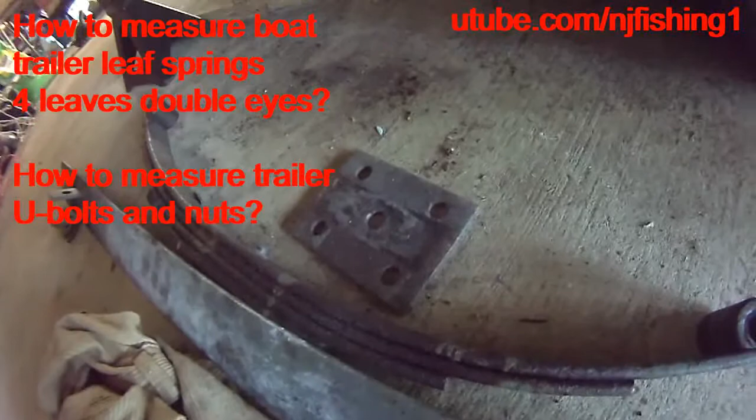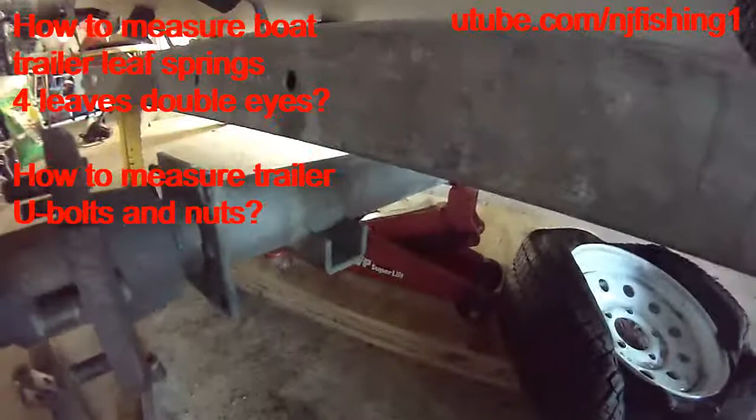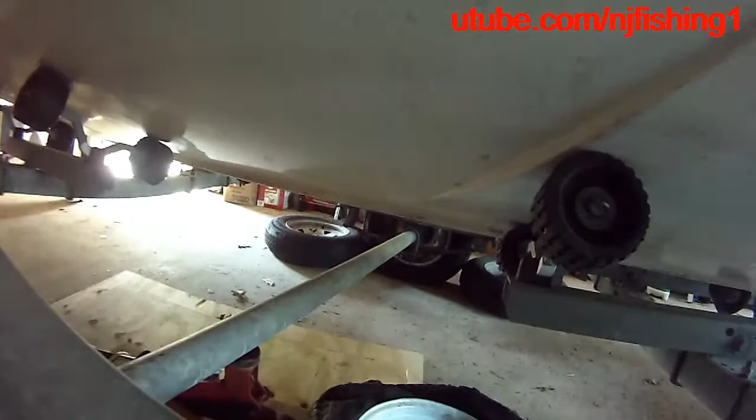Okay, so now I just want to measure everything and then take inventory, and then order parts. So this is one side of the trailer. I still got that other side to take apart and replace, but at least this section is done.

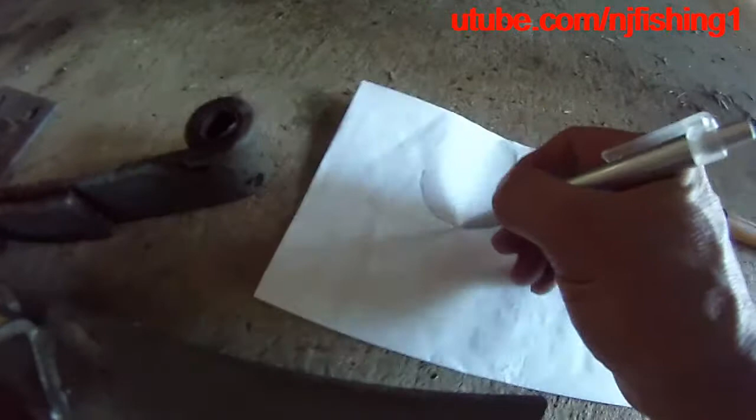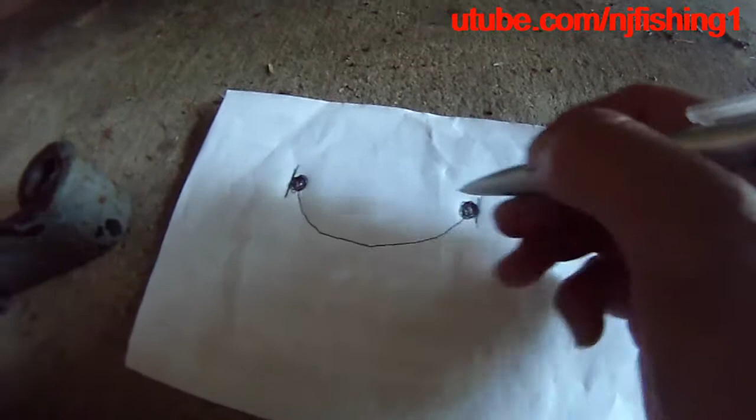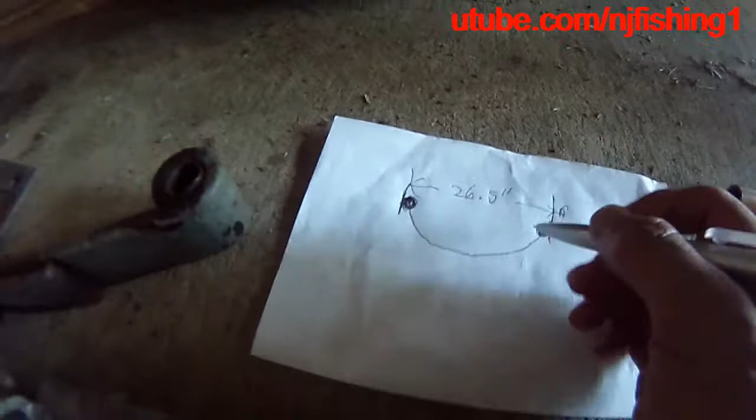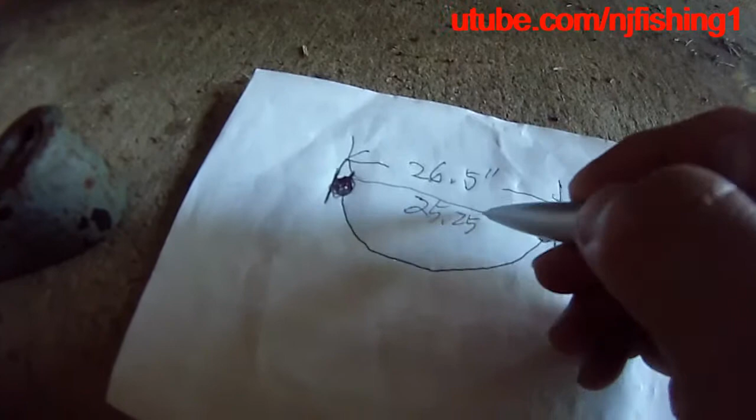Let me draw the map here. So basically I have this leaf spring, and from the most outside to the most outside of the eyelet, it's 26.5 inches. And from the center of the two, it's about 25.25 inches, 25 and a quarter inches. I could be off a little bit, but that's the best I can do.

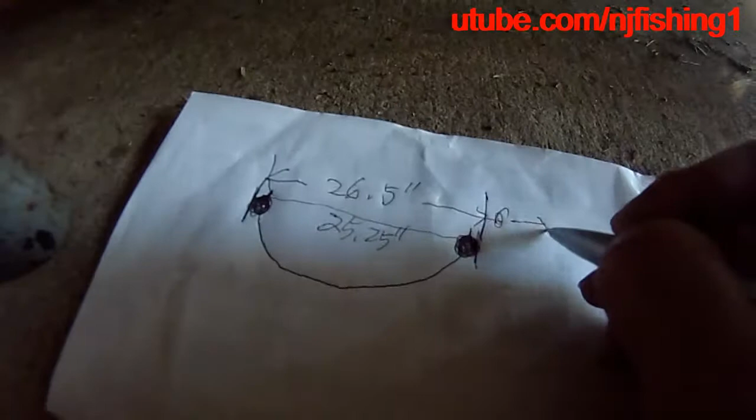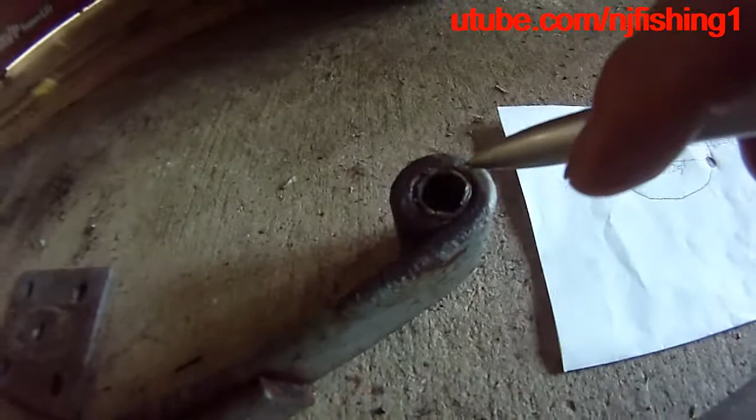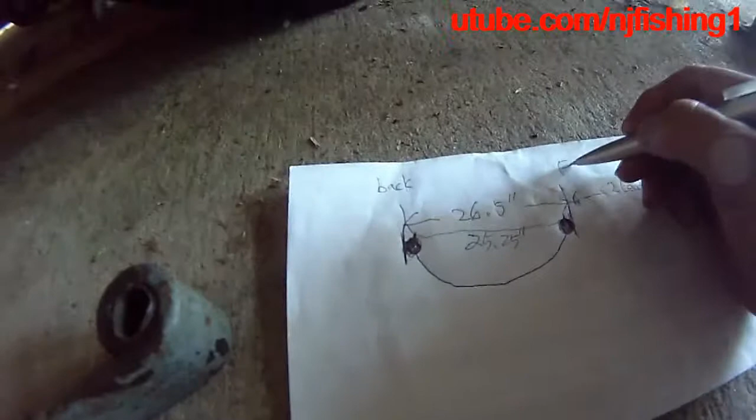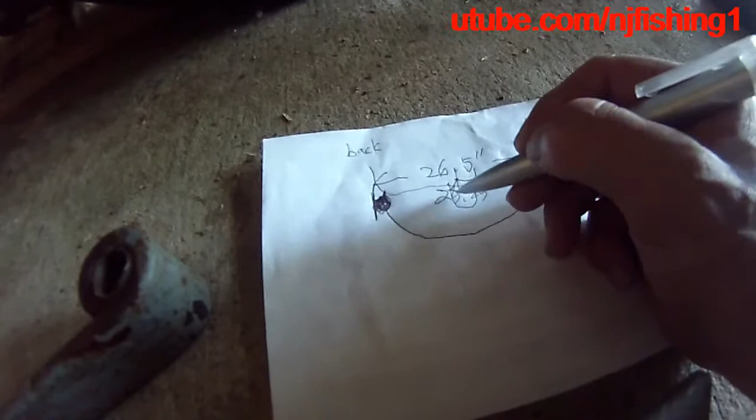So I need two leaf springs for my project. Now this front bolt is good, so I do not need it. This is back and this is front. So I need, right here, two U-bolts I need to buy, and also nuts I need to buy.

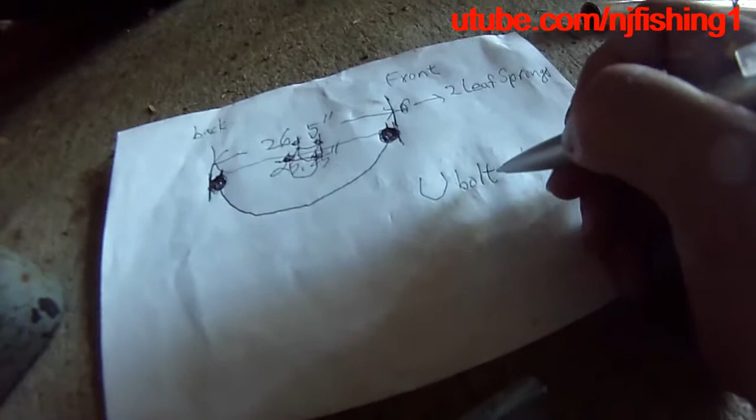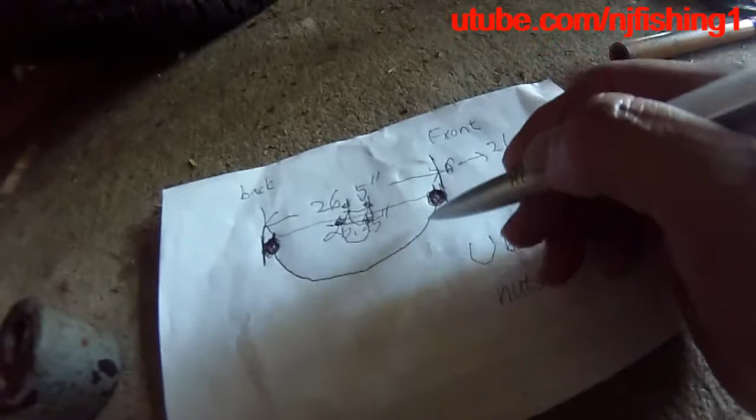Okay, so the U-bolt, I need two of them. And for the nuts, for the bolts, I need 1, 2, 3, 4. So I need 4 nuts. That's just for the middle part. The front part has a long screw. That's okay, and there's also the nut I may want to buy.

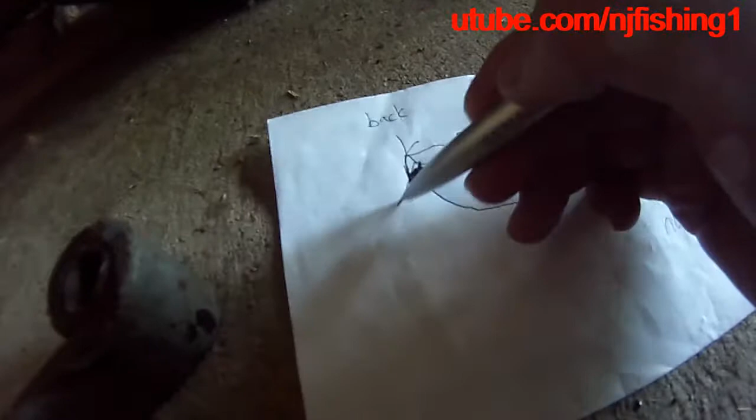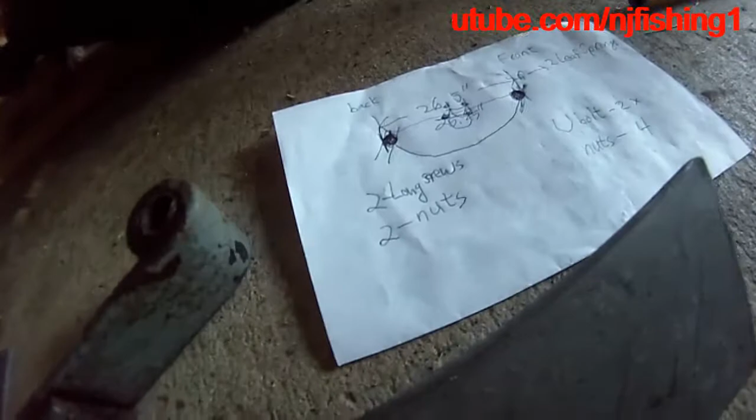I'll find out, but there are two long screws in the back. So two long screws, I'm gonna measure it. And then two nuts that I cut off for the back, so I'm gonna order those too. I believe all the nuts are the same measurements. I'm gonna take a look.

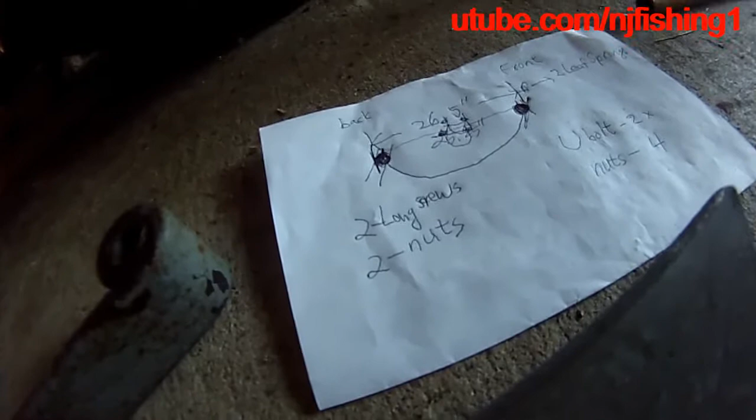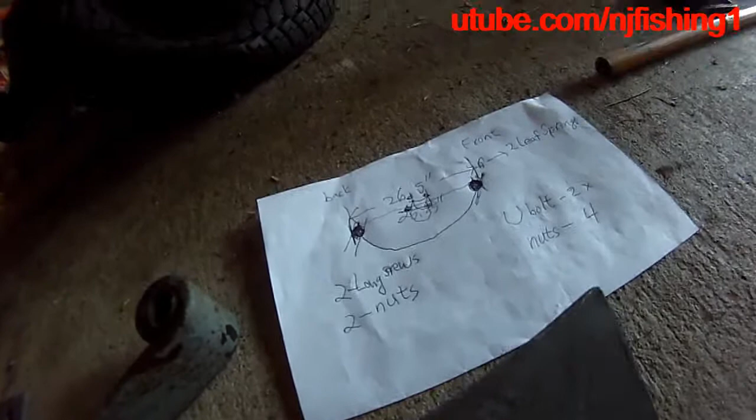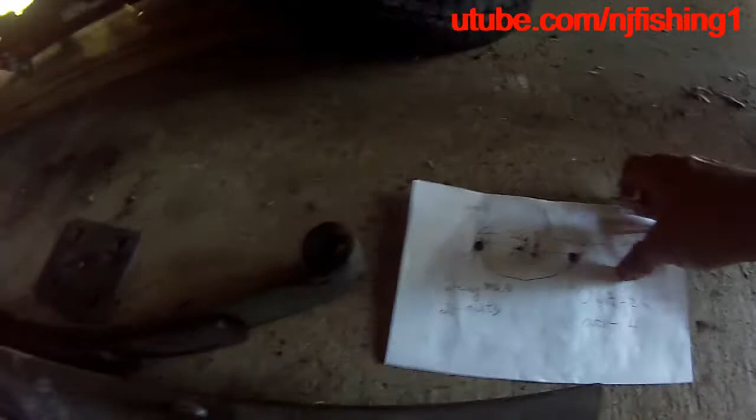So that's just one side, and then I'm just gonna double everything that I have here by 2 to get another pair for the other side, and just throw away the old bolts and nuts. So there you have it. I'm gonna reuse this plate. Looks good, so I'm not gonna buy anything new.

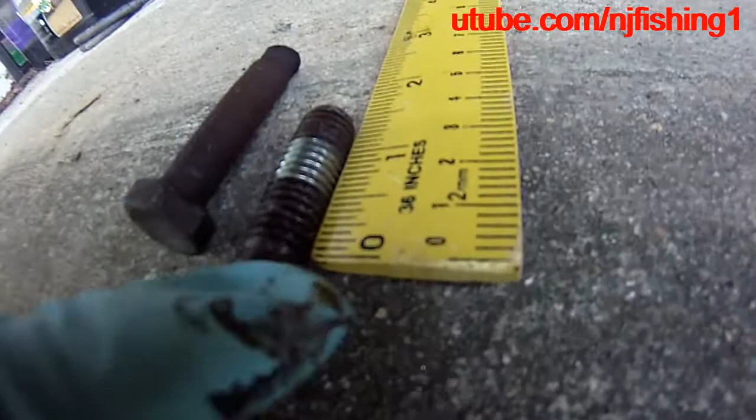Okay, so two long bolts. I believe it's 3.5 inches, you can see over there. 3.5 inches, because that's 4 inches, that's half an inch. Oh, 3.75 inches. Okay, 3.75 inches. And the threaded portion is 1.5. That's 1 inch, that's half, that's 2, so it's 1.5 inches.

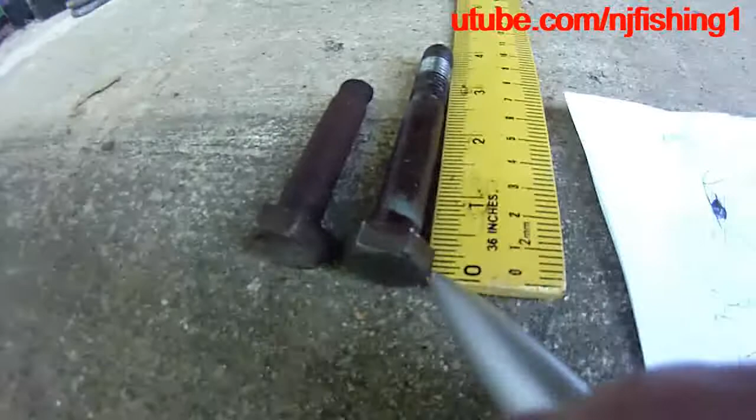Two long screws, it's 3.75 inches long. Well, 3.75 or 3.5 inches without a head, 3.5 inches without the hex head, but otherwise it's 3.75 inches. You can see from the top of the hex head to the end of the bolt, that's 3.75 inches.

And then 2 nuts like these, because they were totally rusted over there, so I need to replace them. So that's the 2 long screws and 2 nuts.

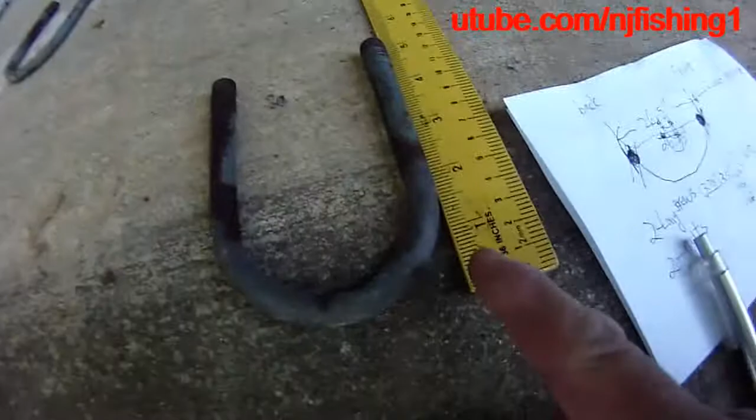Oh, the screws, I need to know the size of the screws. But let me take a measurement of the U-bolts, see how long the U-bolts are. This one is cut, and these 2 are cut too. So I have no way of knowing the real length, but I think it's 5 inches long, maybe even longer.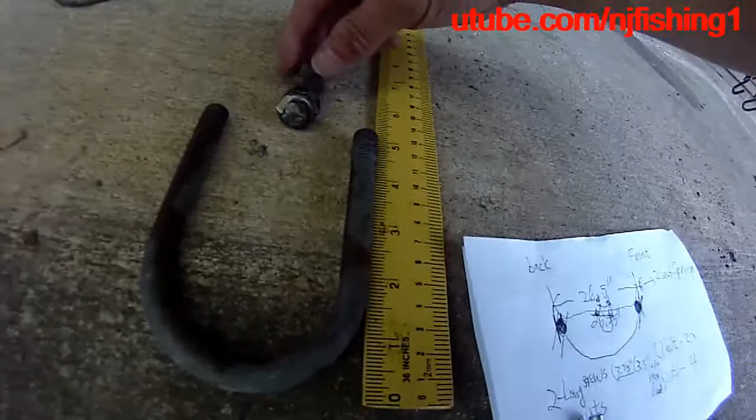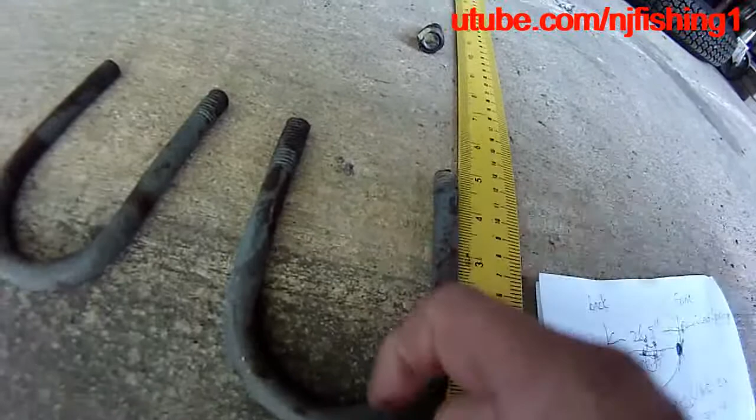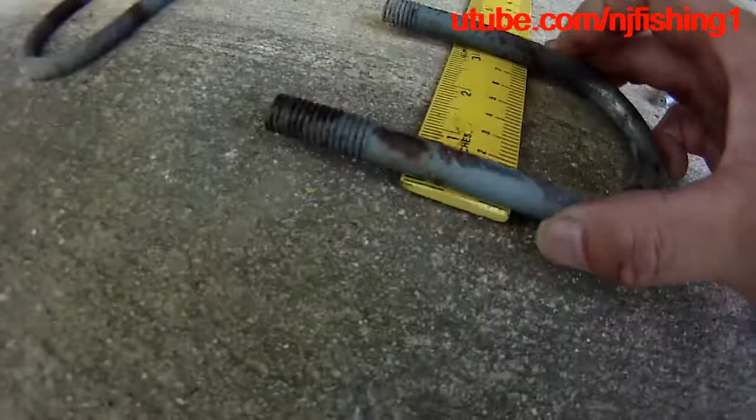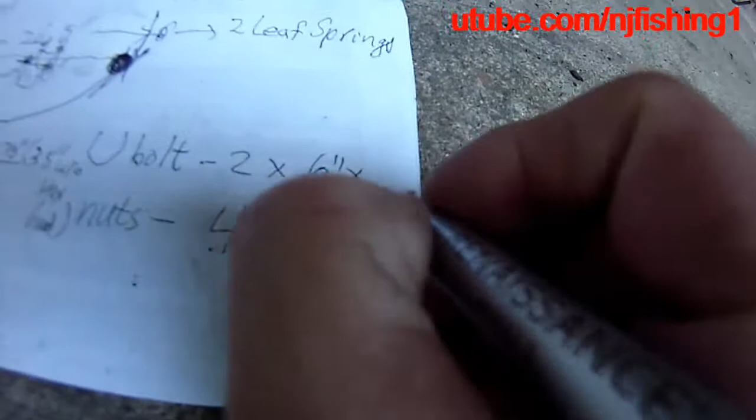Let's see, and this guy's over here. So I would say this is a 6 inch U-bolt. Okay, 6 inches, and the U-bolt, 6 inches by, that's the length. And the width is, I would say 3.5 inches, you can see here. So 6 inches, 3.5 inches wide, 6 inches long. It doesn't look that long, but after I put this over here, then it's 6 inches long.

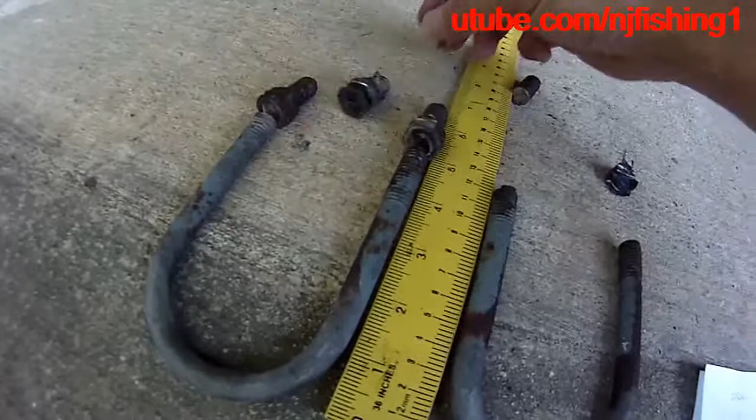What about these 2 guys? Get them over to here and get these. I think that's that, yeah, 6 inches. This guy go here, and this guy go here, I think. Maybe this guy go here, 6 inches. This guy go here, and this guy go here. So you can see it's about 6 inches long, this bolt. 6 inches long.

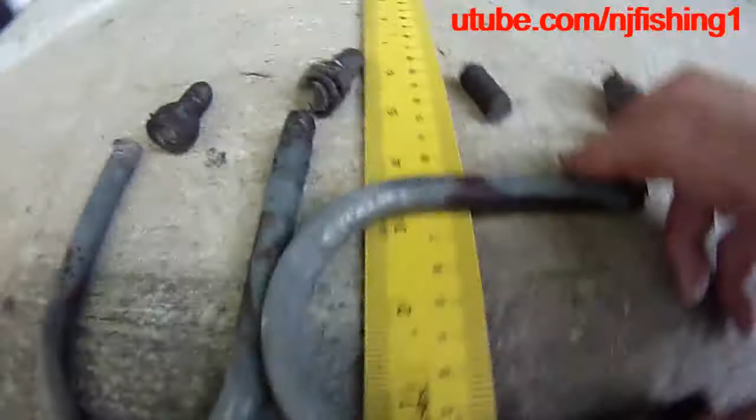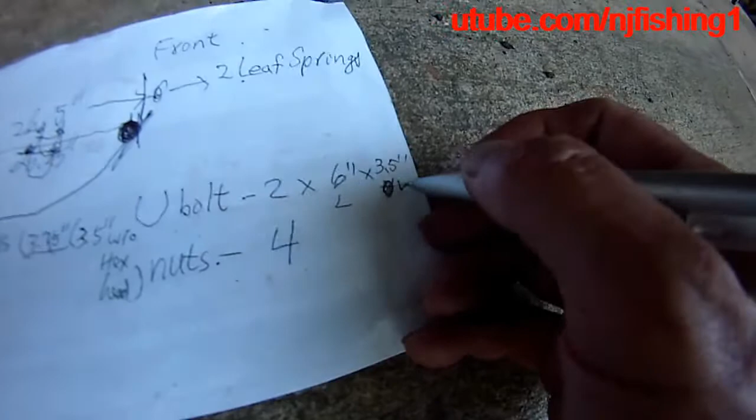Anyway, so it's 3.5 inches wide. See, 3.5 inches wide, because here it's 4 inches. That's the half inch, 3.5, 4. So you can see that's 3.5 inches wide, and 6 inches long.

4 nuts, 2 bolts, and I just need to know the screw size. So let me get the measurement of the screws. It's very easy.

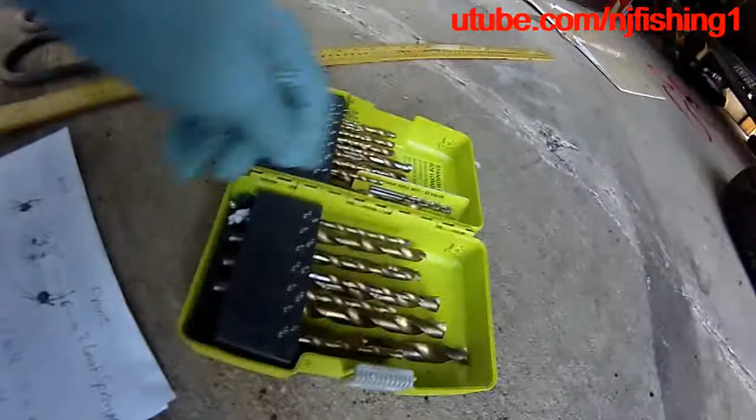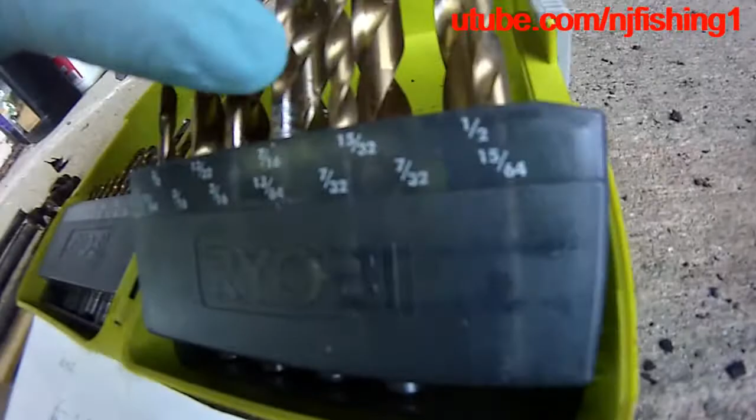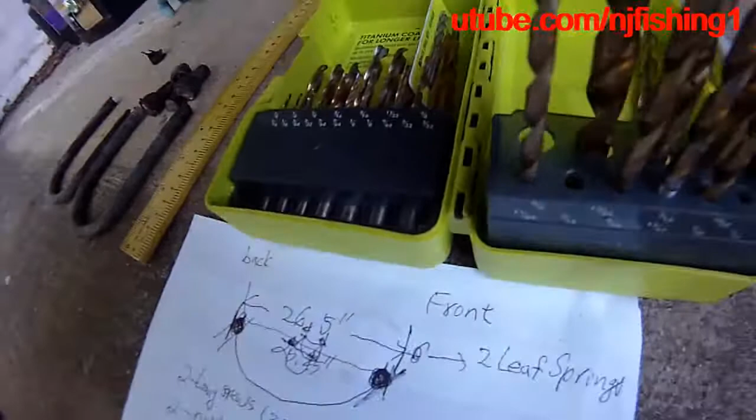In order to measure the bolt size, I did it in another video where I used this titanium box, and it's clearly labeled for their size. As you can see, this biggest one is 1/2 inch, and then this one is 3/8 of an inch, and my guess is these are all 3/8 of an inch.

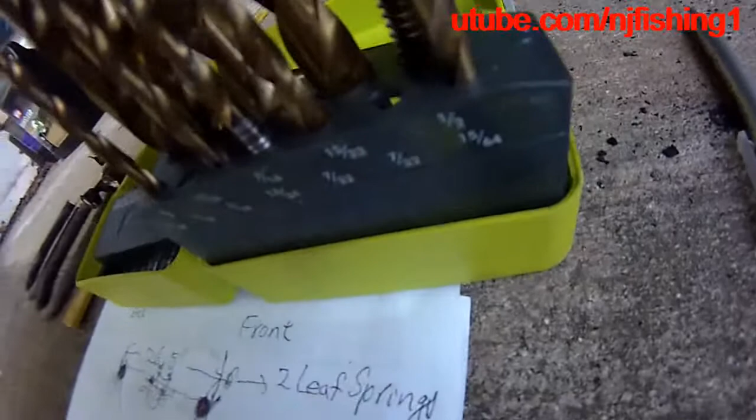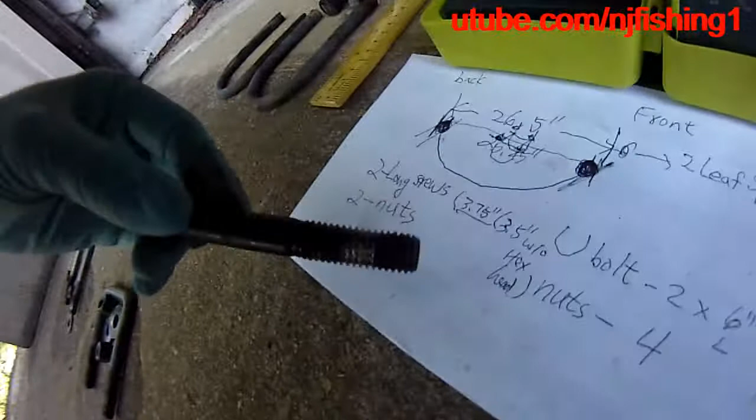Oh, so this is one of the long screws, which is 3 3/4 inches long. Oh, and I had it backwards. So I'm like, how come it wouldn't go in?

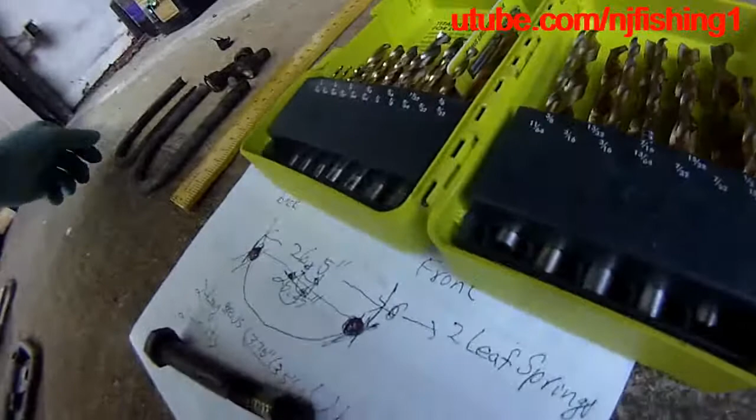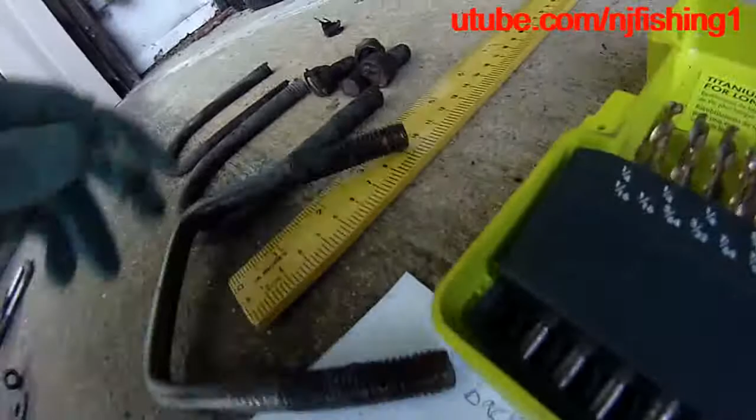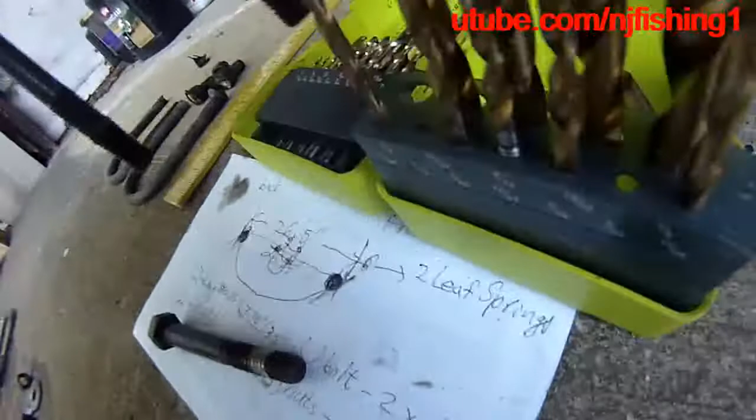Okay, so here is the U-bolt. I think these are the same. Yeah, so the U-bolt size is maybe half an inch or 3/8 of an inch. Now it can't be 3/8 of an inch. 3/8 of an inch is too small. So half an inch? Probably yes. Yeah, look, it's half an inch.

And anything smaller than that, the next one is 15/32. Let's try 15/32. I doubt it's 15/32, but you know, just give it a try. Let's put the half an inch back.

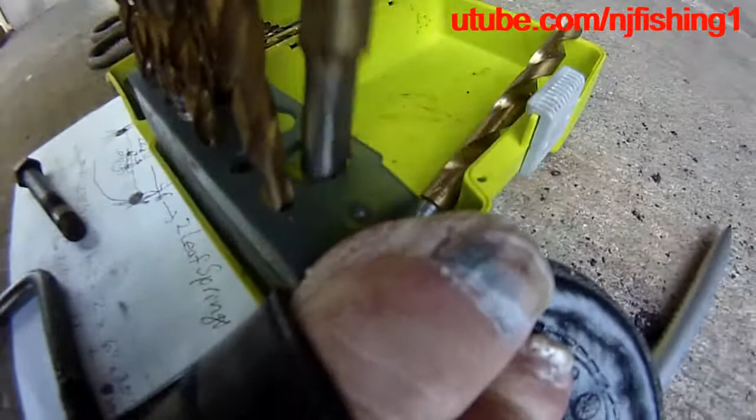So the next one, the front one is 7/32. The back one is 15/32, which is the one I took out. So I'm gonna put this screw in there. Nope, can't fit in there. So I know it's not 15/32, but half an inch. Good. So these are all half an inch bolts, and that's how you do the measurement.

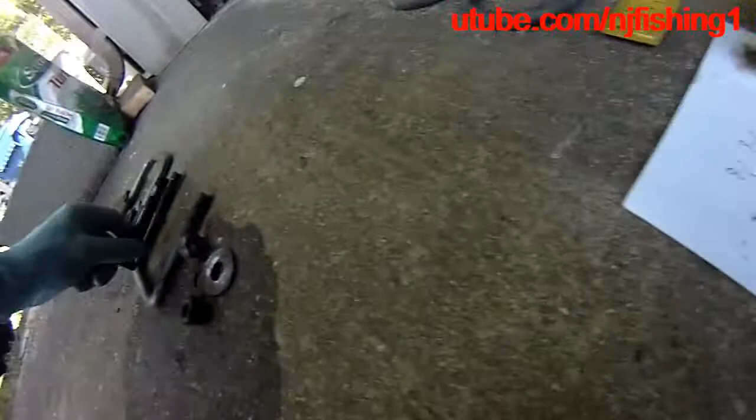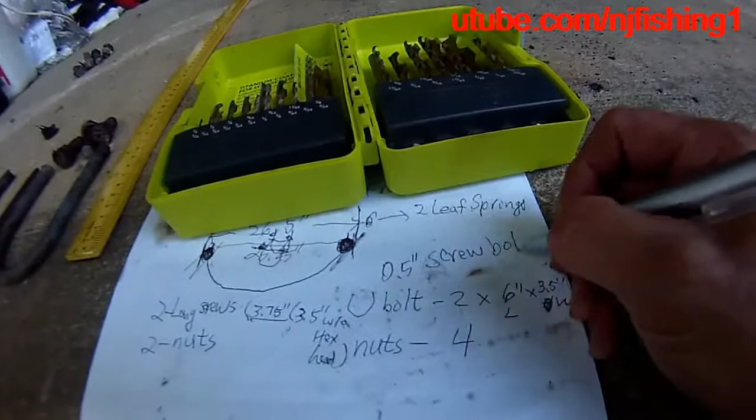And that's it. So whether it's the U-bolts or the long screw, they're all half an inch. Okay, so they're all 0.5 inch screw bolts. Okay, so I am ready to order. That's how you do it, and that's how you do it. You know, take a long ruler, and then you will be able to measure.

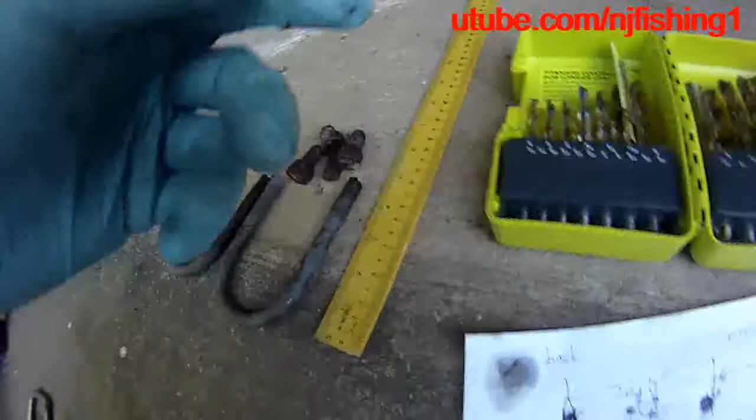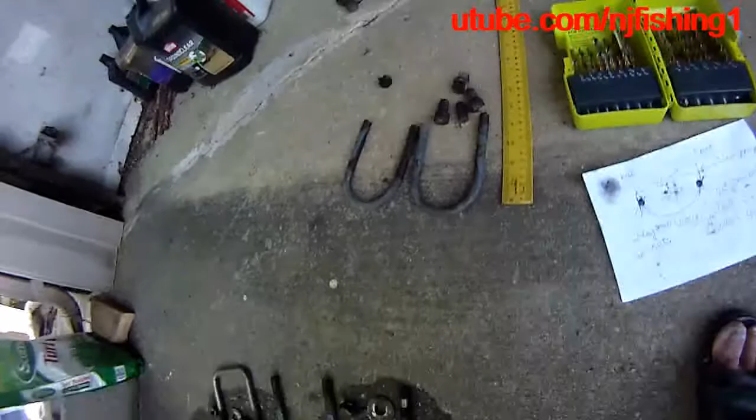So the U-bolts are 6 inches long, 3.5 inches wide, and these bolts are half an inch. So the nuts are half an inch nuts. And these screws for the eyelet with the bushings, they are, what did I say, 3.75 inches, 3 3/4 inches long, and half an inch, 0.5 inch screws or bolts.

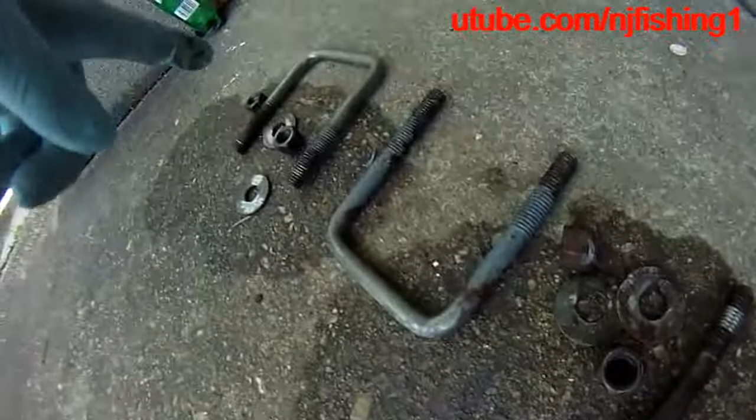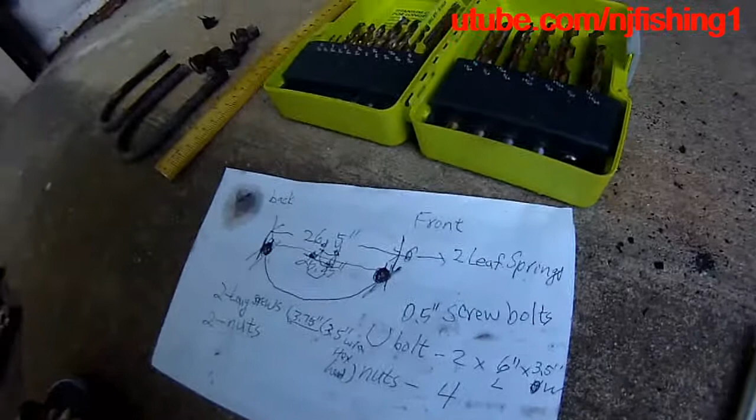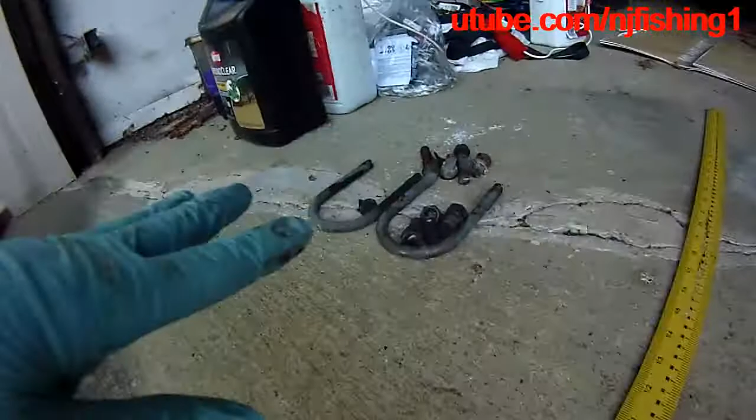So I just spray some penetrating oil to try to get rid of the dirt, and I'm going to put some grease on these, and then I'm going to lock the mount onto the trailer. When I get the parts, I'll mount the leaf springs, and then when I'm done, I'll do the other side. So these are the broken parts, these are the good parts, and this is the parts that I want to order. Gonna put my stuff back in. That's it.